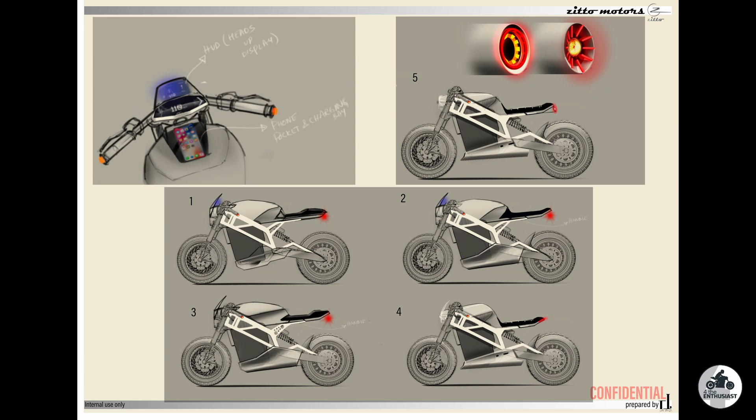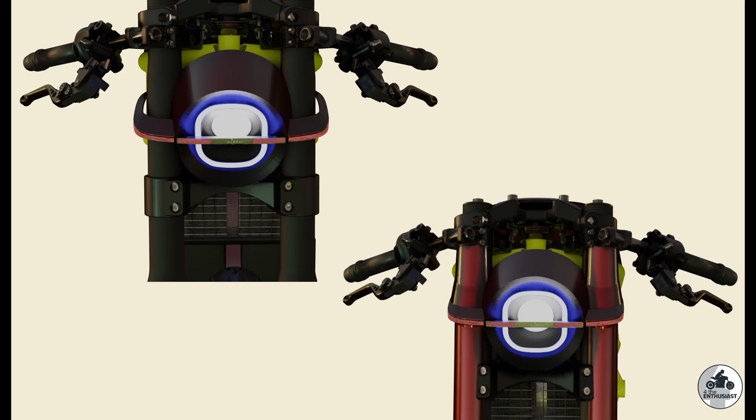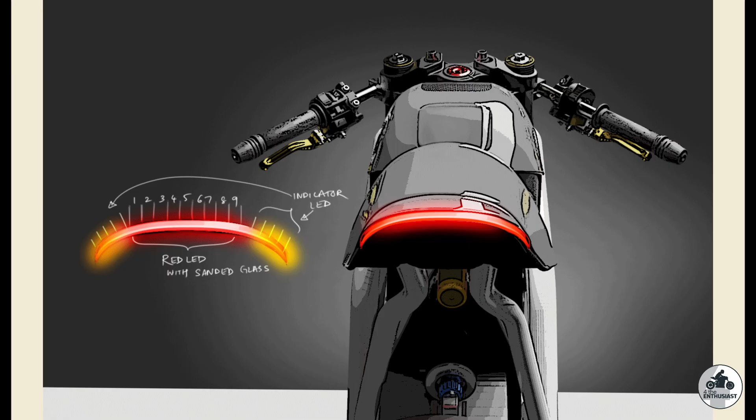After the sketching phase is complete, the work transitions into digital formats, and more detailed digital renders are produced. After the rough sketches, these refined visuals show how the vehicle will look in three-dimensional space. They may still resemble drawings, but now they incorporate realistic proportions, lighting, and more defined details.

Every component and subcomponent is designed. Color options are experimented with, and the design team evaluates multiple directions, including infotainment layouts and interior themes.

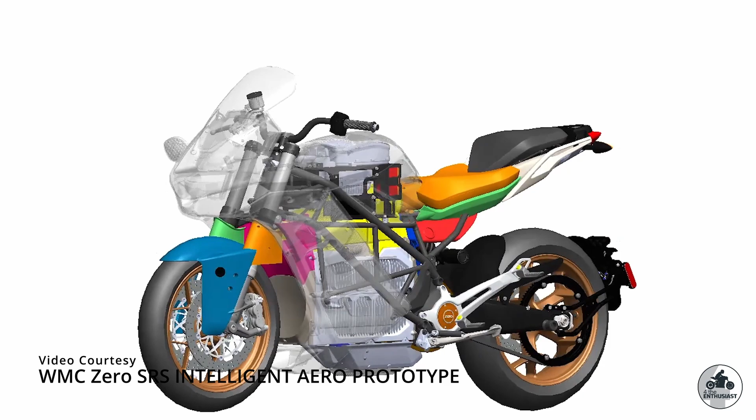Once the rendering stage reaches maturity, the project moves to 3D modeling. At this stage, the team develops 3D models in collaboration with other departments. Engineers from electrical, mechanical, and other divisions work together with the designers, communicating constantly, advising on what can be manufactured, what needs modification, and what is structurally practical.

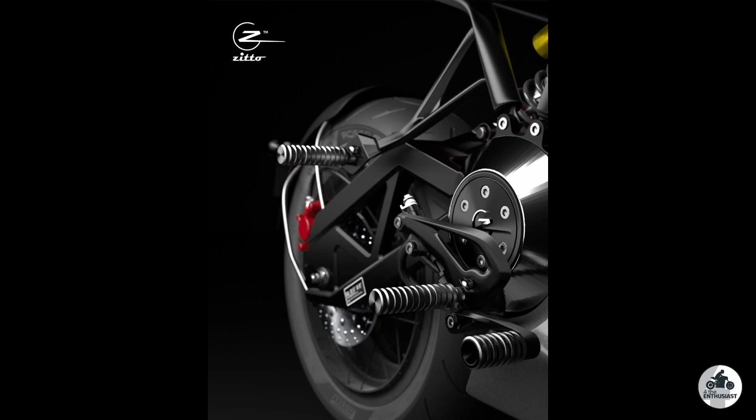These iterative discussions and modifications lead to a finalized design, which is translated into detailed models viewable in the company's CAD systems. In the CAD models, every millimeter of the vehicle is precisely defined. Once the surfaces, geometry, and three-dimensional forms are finalized, the process moves to clay modeling.

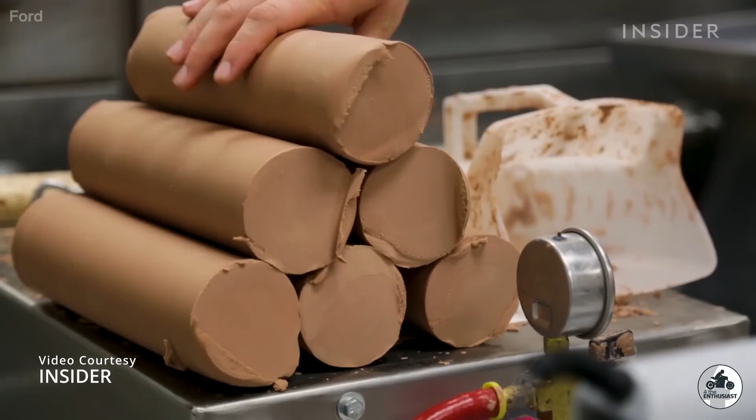Clay modeling has been a crucial step in the automotive industry for nearly a century, and no major company skips it. It helps designers perfect shapes and observe how surfaces capture light. Industrial clay, plasticine, is heated and applied to scaled models.

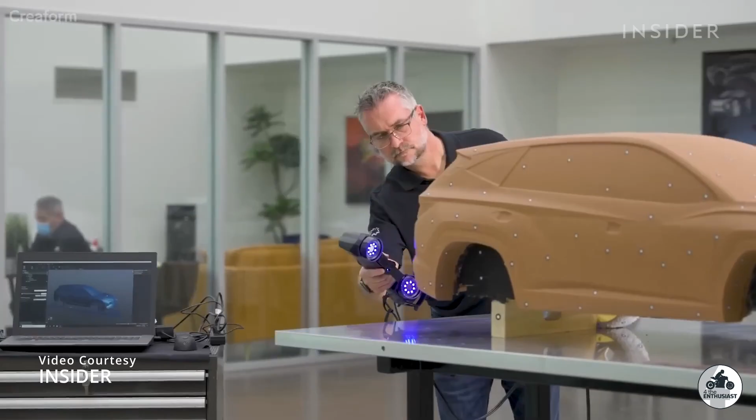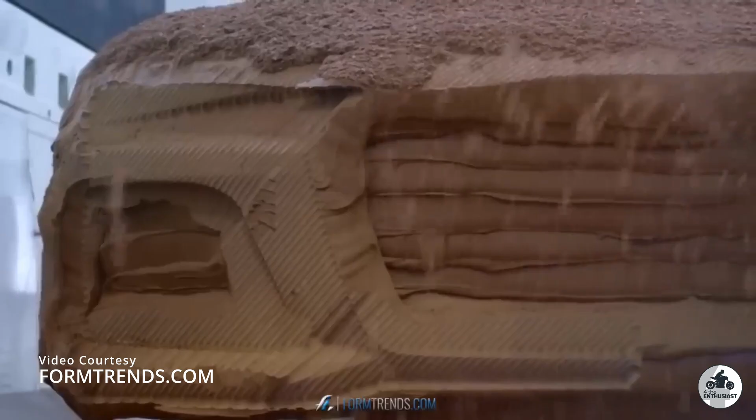These small models are scanned back into digital systems so engineers can verify that everything still matches the intended design. Adjustments are made repeatedly, and several small clay models are produced before moving to a full-scale clay model, which uses foam blocks as a base, covered with clay to form the vehicle's exterior shape. A CNC machine may be used to remove large portions of clay, establishing the rough surface.

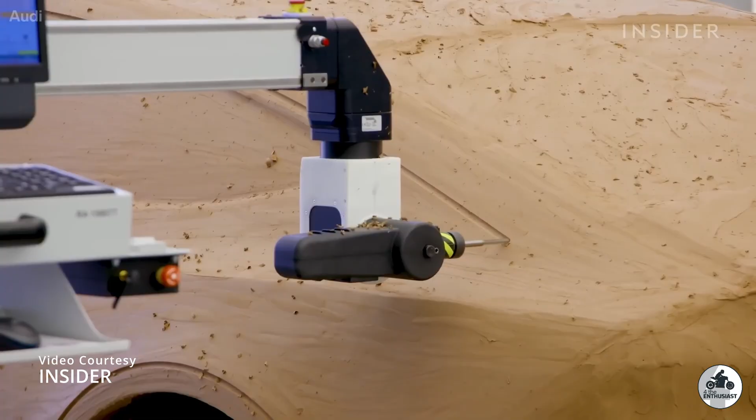Earlier, everything was sculpted manually; today, much of it is computer-assisted. Once the rough form is created, skilled sculptors refine the model. Under the supervision of the designer, they shape the surfaces until they achieve the correct forms.

Designers use thin black tape to mark lines and define visual elements on the clay surface. Teams compare these reflections with digital renders to ensure consistency.

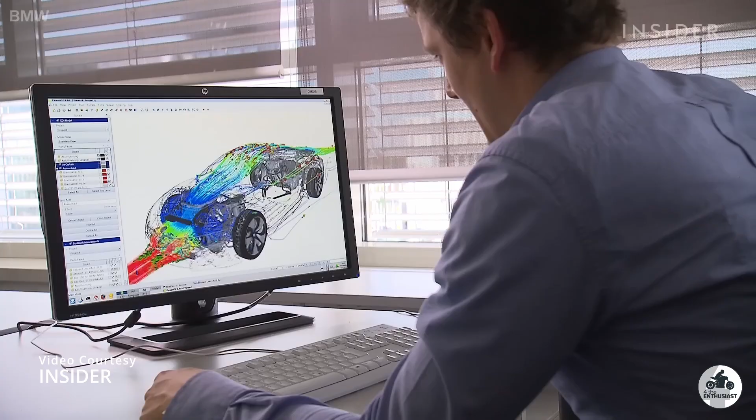Meanwhile, engineers may perform aerodynamic evaluations directly on the clay model. Since clay can be reshaped easily, modifications can be made immediately.

Reflective films may also be applied to observe how real light interacts with the shapes. A surface layer is applied on top of the clay to produce a paint-like reflective finish. This helps designers visualize how the final painted vehicle will appear under real lighting.

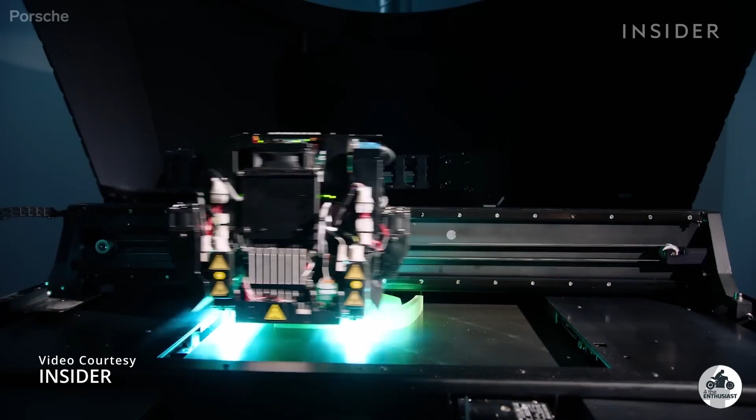3D printing is also heavily used during this phase. Many plastic components can be printed quickly and fitted directly to the clay model, which speeds up prototyping.

Once the clay model is fully approved, the entire object is scanned again. These scans enable engineers to build internal structures to support the exterior design.

What we see on the outside are only surfaces. Structural components must hold them together. For example, a vehicle door has two layers: an external panel for aesthetics and an internal panel that provides strength and support.

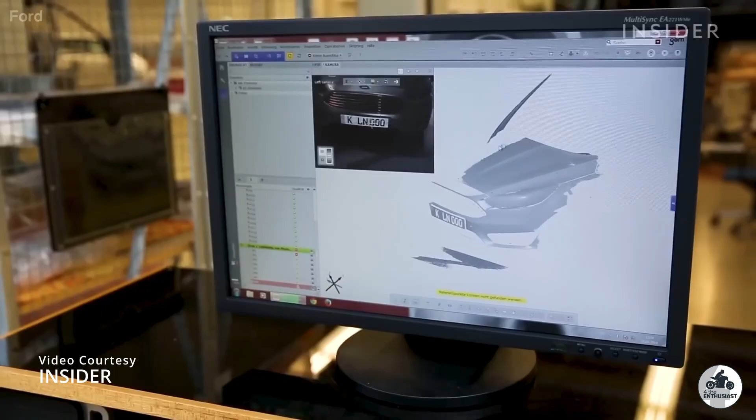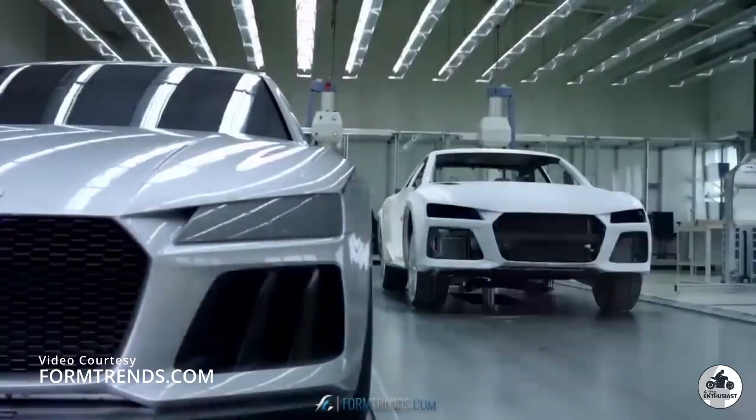After this step, the process moves into prototyping. Prototypes can vary widely based on purpose. Some prototypes are created only for display. Others are functional test vehicles. Some are built to show journalists but are not meant to be driven. The design of the prototype depends entirely on its intended use.

For example, a show-only prototype is built for visual impact, not performance. In this type of prototype, every exterior part must be manufactured, even though it won't be used on the road.

Established companies like Audi have significant advantages here. Many prototypes showcase a brand's long-term vision. Examples include Rolls-Royce or Polestar concept cars. These show possible future directions.

Some prototypes are nearly production-ready but have incomplete interiors or no working drivetrain. These prototypes can still be shown to the media to gather feedback.

Returning to our example, a one-to-one concept prototype involves custom manufacturing. Every part, every surface, is made specifically for that model. None of the parts come from a standard assembly line. This makes prototyping extremely expensive.

After the prototype is built, it is revealed to the public. Feedback is collected from journalists and industry analysts. The result is the concept prototype.

Established manufacturers benefit greatly in this process. They have standardized procedures. Brands like Audi already have internal protocols and workflows that have been refined over decades. They also have a deep parts supply network.